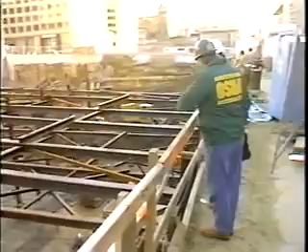In recent years, more than 50% of OSHA's inspections have been in the construction industry. Since scaffolds are used at most construction sites, OSHA developed this video program to aid compliance officers in conducting inspections. We have consulted with CSHOs from regional and area offices and the scaffolding industry to help ensure that this video will be beneficial.

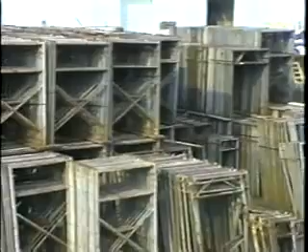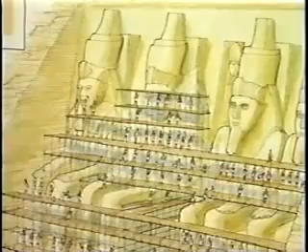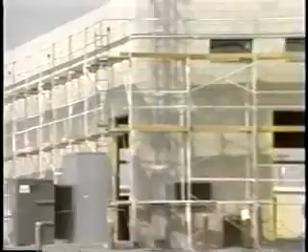Scaffolds have been in use in some form or other since people began to build structures. It's likely that some form of scaffolding or work platform was used in constructing the pyramids of Egypt, as well as the Great Wall of China. Today, scaffolds continue to be used in almost every type of construction.

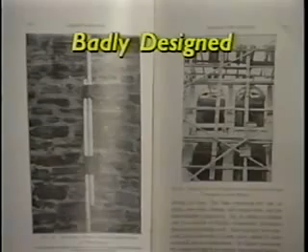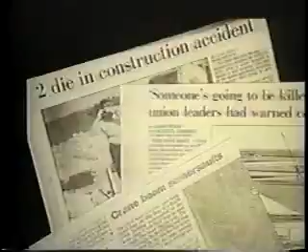As far back as 1915, scaffolds caused enough safety problems in the United States to prompt an insurance company to publish a book titled Safety Engineering Applied to Scaffolds and Related Safety Hazards. This publication described scaffolds in use at that time as being badly designed, often constructed with inferior materials, dangerous, and unfit for their intended use. Regrettably, that description is applicable today. In many instances, things have not changed that much.

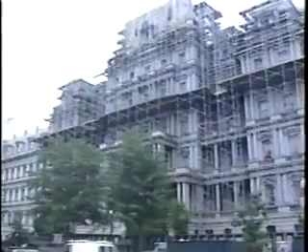There have been improvements over the years in the design and in the components of scaffolds. As new designs and technology change the work environment, improvements and/or modification of work practices and regulations are required to reflect these changes. And because the scaffold industry is so fluid and the need to keep current so great, the OSHA Scaffold Standard, Subpart L, is presently being updated to reflect some of these changes.

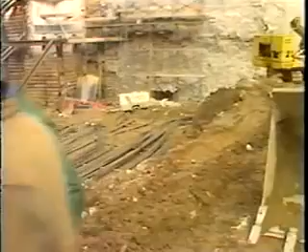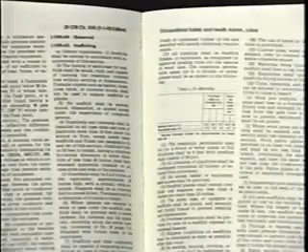This video training pertains to basic scaffold requirements found in the current standard, general provisions of the proposed standard, and some of the critical items to look for during an inspection. Compliance officers should carefully review the new standard when issued to identify any specific technical requirements or changes. Let's take a close-up look at scaffolds, how they are made and used.

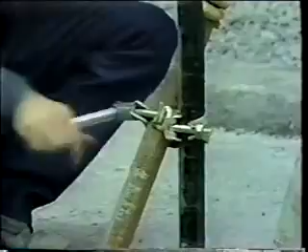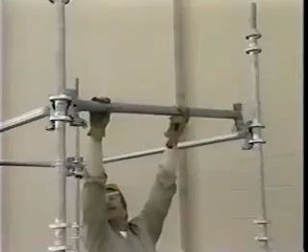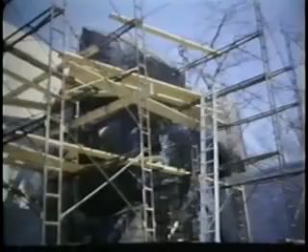Since the 1930s, metal has been the preferred material used to construct scaffolds instead of wood, making scaffolds lighter, stronger, and easier to assemble. Despite these improvements, many injuries and fatalities still occur due to improper assembly, disassembly, and use of scaffolds. Considering the wide variety of scaffolds in use and the hazards they pose, it isn't surprising that a recent OSHA study showed that 20% of construction deaths were due to falls from scaffolds or elevated work platforms.

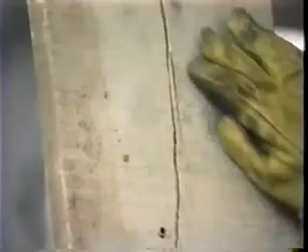Compliance officers must be familiar with the requirements of the standards and pay special attention to scaffolds when inspecting construction sites. To make it easier for compliance officers to target inspections toward the most likely areas of scaffold failure, we will look at how some of the more familiar types of scaffolds should be constructed.

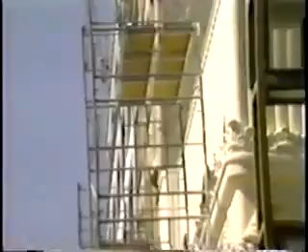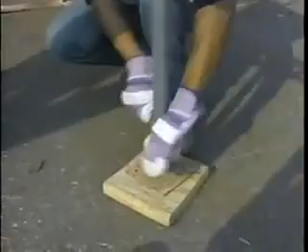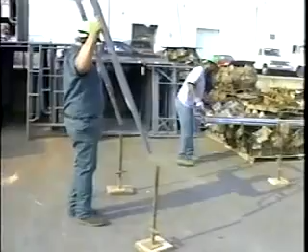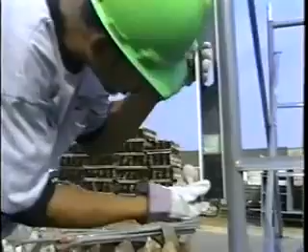Let's first look at the tubular metal frame scaffold, the most popular and widely used type of scaffold found on construction sites today. The tubular welded or fabricated scaffold is a sectional frame type scaffold consisting primarily of end frames and cross braces. Scaffolds must be properly braced by cross bracing to secure the vertical members laterally, and must be of such length as to automatically square and align the vertical members. Proper cross bracing will also ensure that the erected scaffold is plumb, square, and rigid.

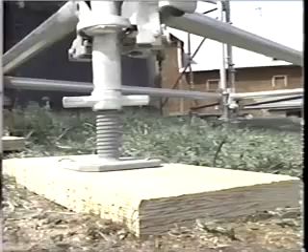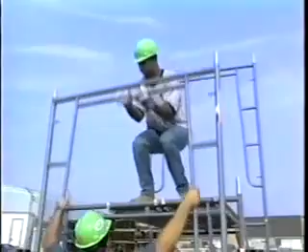Scaffold legs are either set on adjustable or plain bases, which are placed on mud sills or other foundations to adequately support the maximum intended load. If built more than one section high, the scaffold frames must be placed one on top of the other with stacking pins to provide proper vertical alignment of the legs. Where uplift may occur due to wind loads or hoisting operations, make sure that the end frames or sections are locked together.

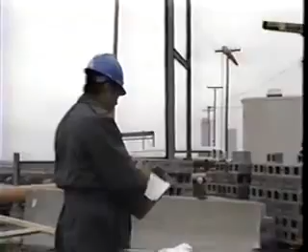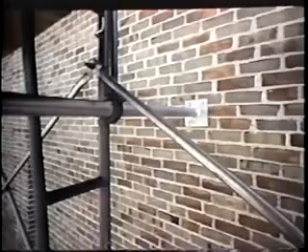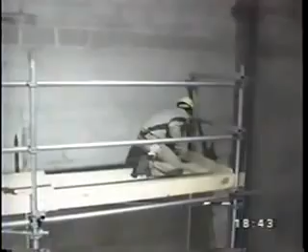When erecting scaffolds, the vertical height must not exceed 4 times the minimum base dimension. If the height exceeds the 4-to-1 ratio, the scaffold must be tied to the building or structure at each end and at intermittent intervals, not to exceed 30 feet horizontally and 26 feet vertically. Outriggers can also be used to broaden the base and stabilize the scaffold. To provide stability and prevent lateral movement, it is a good practice to secure all scaffolds to the building or structure at intervals of 25 to 30 feet horizontally and 25 feet vertically.

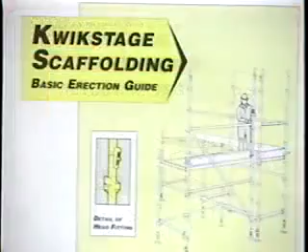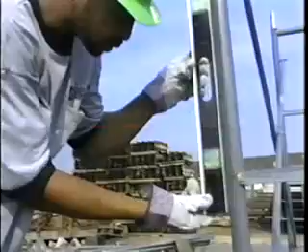Drawings and specifications for all frame scaffolds more than 125 feet in height above the base plates must be designed by a registered professional engineer, and copies of the plans made available to the compliance officer for inspection purposes. Since there are several manufacturers of metal frame scaffolds, the mixing of components or individual member pieces is not recommended, but is allowed if the end frames match, the cross members match, and stability and plumbness are maintained. In no case shall there be any modifications made of any components, nor shall they be forced to fit.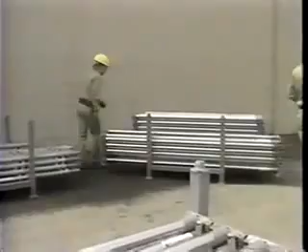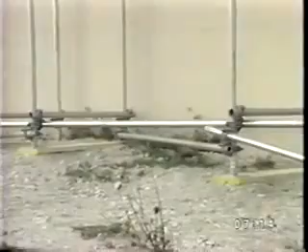Another type of scaffold, the tube and coupler, is often used when a work platform is required to be built around an irregular structure. The tube and coupler scaffold usually consists of 2-inch outside diameter steel tubing used to make posts, bearers, runners, and braces. The runners are placed along the length of the scaffold and interlocked to form continuous lengths and connected by coupling devices to each post for stability. The bearers, which help carry the load, are installed across the width between posts and securely coupled to the posts to form a level base for the work platform.

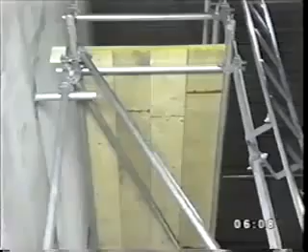Cross bracing is installed across the width of the scaffold at least every 3rd set of posts horizontally. Diagonal bracing is used and installed at approximately a 45-degree angle from near the base of the first outer post upward to the extreme top of the inner post to maintain structural integrity. For stability, the entire scaffold must be tied to and securely braced against the building or structure at intervals not to exceed 30 feet horizontally and 26 feet vertically.

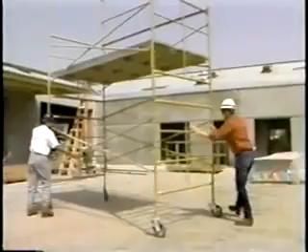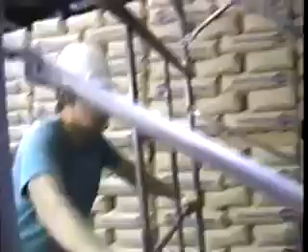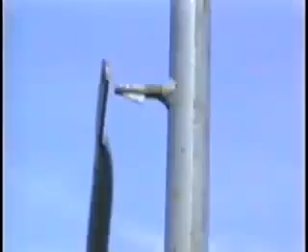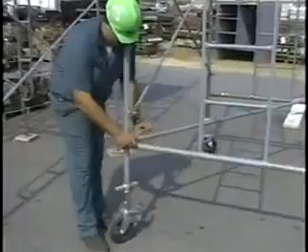Manually propelled mobile tubular welded scaffold, commonly known as the mobile scaffold, is primarily designed for use on level concrete or other smooth floors, to access elevated work areas, or simply to install equipment or parts. Mobile scaffolds, which are supported by casters, must consist of cross braces and diagonal braces secured laterally to the vertical end sections or members to maintain stability. The cross braces and diagonal braces must be of a length that will automatically square and align vertical members so that the erected scaffold is always plumb, square, and rigid.

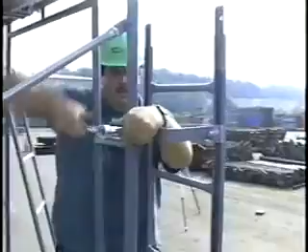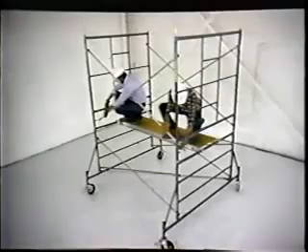To ensure further stability and reduce the possibility of tipping, the height must not exceed 4 times the least base dimension. For safe access, ladders or stairs must be provided, either built in or attached to the scaffold. Mobile scaffolds are limited in height to a single unit or section unless the entire system is approved in writing by a registered professional engineer, or it is erected in accordance with instructions furnished by the manufacturer.

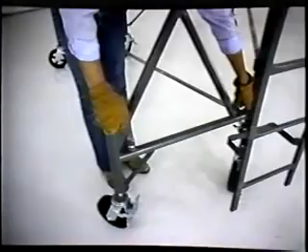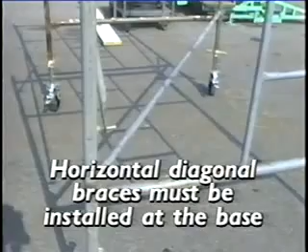Casters or wheels are attached for mobility. Outriggers, which are also equipped with wheels, can be added for additional stability. Prior to any personnel getting onto a mobile-type scaffold, all wheels must be secured and locked. Casters must be pinned to the scaffold leg or screw jack. Horizontal diagonal braces must be installed at the base, and the work platform must be fully planked.

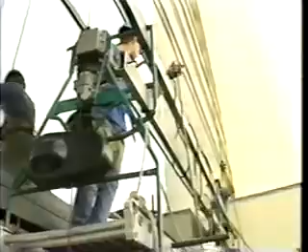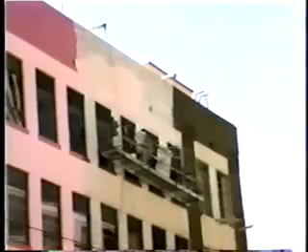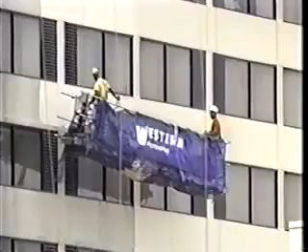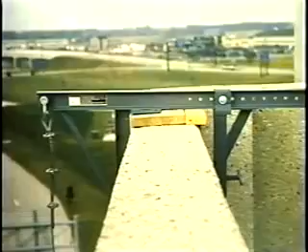The swinging scaffold, or 2-point suspension scaffold, is a platform not less than 20 inches nor more than 36 inches wide overall. It is supported at each end by metal hangers or frames designed to incorporate guardrails, toe boards, and the hoist mechanism. Swinging scaffolds are suspended from overhead anchorage points by either wire or manila rope, which must be capable of supporting at least 6 times the intended load. Roof irons or other supporting devices, which fit over the edge of a building as anchorage points, must be made of wrought iron, mild steel, or other equivalent material of proper size and design, securely installed and anchored.

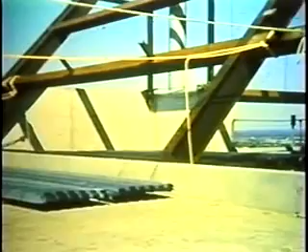Tiebacks of 3/4 inch manila rope or equivalent shall serve as a secondary means of anchorage and should be installed whenever possible at right angles to the face of the building and secured to a structurally sound portion of the building. The sheaves of all blocks and the hoisting mechanism must fit the size of rope used.

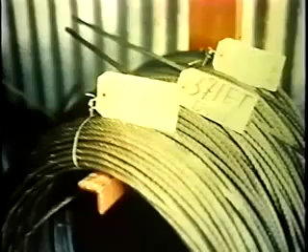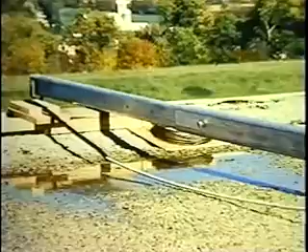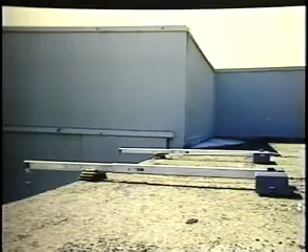All ropes, wire and fiber, hangers, platforms, and other supporting parts shall be inspected before every installation and every time it is used. 2-point suspension scaffolds must also be securely lashed to the building or structure to prevent them from swaying due to winds or work activity. 2-point suspension scaffolds are designed for a total working load limit of 500 pounds, or a limit of 2 workers on a scaffold at one time.

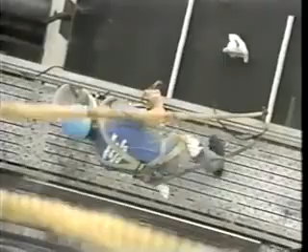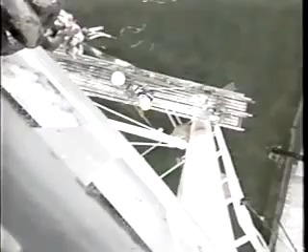Due to the stress of constant movement by workers, the entire scaffold must be designed and capable of carrying 4 times the rated load. In addition, the supporting ropes or cables must be capable of supporting 6 times the rated load. All hoisting mechanisms must be approved by the Underwriters Laboratory or the Factory Mutual company.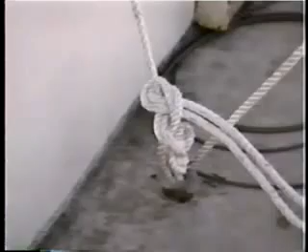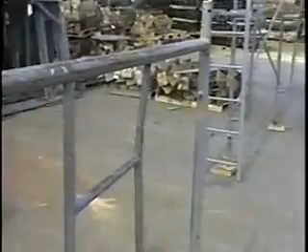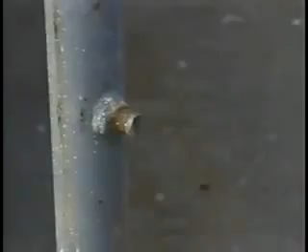Employees working on suspended scaffolds must use a safety belt or preferably a harness with a lanyard attached to an overhead independent lifeline to provide fall protection. This is because the hoisting mechanism or supporting devices could fail. Now, there are a number of things a compliance officer should be looking for when inspecting scaffolds. In addition to checking for the stability of a scaffold, check for any damage to component sections, individual members, planks, or accessory items.

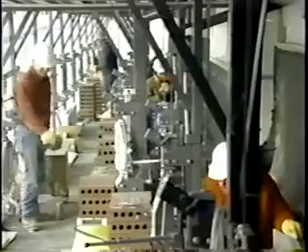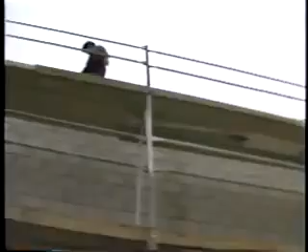Manufacturers rate scaffolds to support 4 times the maximum intended load. Because of the complexities of scaffold erection and the multitude of configurations possible, maximum loads for scaffolds are normally determined by engineering calculations. During the initial inspection, look for signs of distortion or bent members when considering weight limitations on scaffolds. For example, ANSI limits plank deflection under a load to 1/60th of the length of the span. In other words, a 10-foot span is limited to 2 inches of deflection, which can be measured with a tape measure and a straight edge.

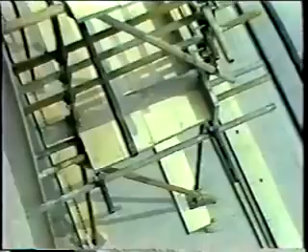Also note whether an access ladder or equivalent means of safely getting onto and off of a scaffold is provided. Ideally, scaffold planks should be metal, usually aluminum. When wood is used, however, the planks must be scaffold grade or the equivalent. That means the specific classifications of strength as determined by either the West Coast Lumber Inspection Bureau or the Southern Pine Inspection Bureau. The classifications are marked on each plank.

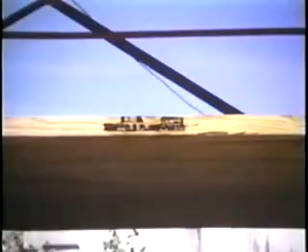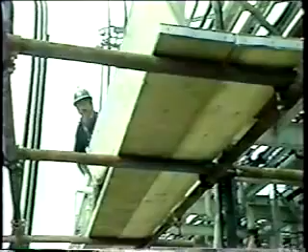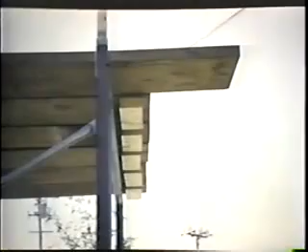All planking and platform sections must be overlapped a minimum of 12 inches or be secured from movement. Additionally, unless cleated or otherwise secured, planking must extend at least 6 inches over the scaffold end supports or bearers to ensure that it does not slip off in use. The planking must not extend more than 18 inches beyond the supports unless barricaded.

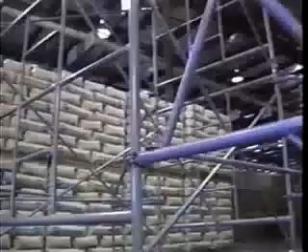In review, accident data tell us that the most important item to inspect on any scaffold is the fall protection system and the stability of the structure. Falls are by far the leading cause of scaffold fatalities. Since scaffolds are elevated work platforms, all components contribute to fall prevention. When inspecting a scaffold operation, you should check for support under each leg in every frame. Make sure that all base plates are in firm contact with supports.

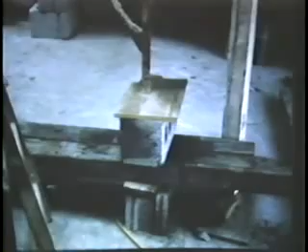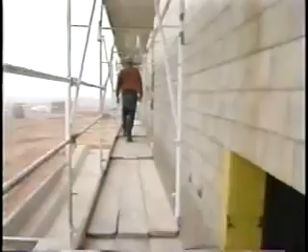Inspect frames for plumbness. Check frames for gaps and misalignment of adjustment screws. Make sure that all end frames have cross braces to ensure stability and plumbness of units. Inspect locking devices, making sure they're tight, and check all planking for proper installation. Make sure anchors are secure between scaffold and structure where required. Verify that all guardrails are in place and secured. Inspect motors on all power-driven scaffolds for proper operation and certification. Check ropes on all suspension scaffolds for proper size and for signs of wear or deterioration.

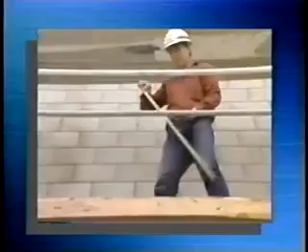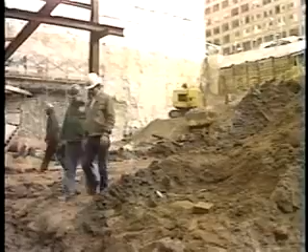We have looked at many of the scaffolds covered in the OSHA standards, highlighted the basic safety requirements, and identified some of the more critical items that you should check when inspecting scaffolds. As a compliance officer, your familiarity with the standards, coupled with a careful inspection of scaffolds found at the worksite, will contribute to reducing the large number of accidents and deaths due to falls from these elevations.